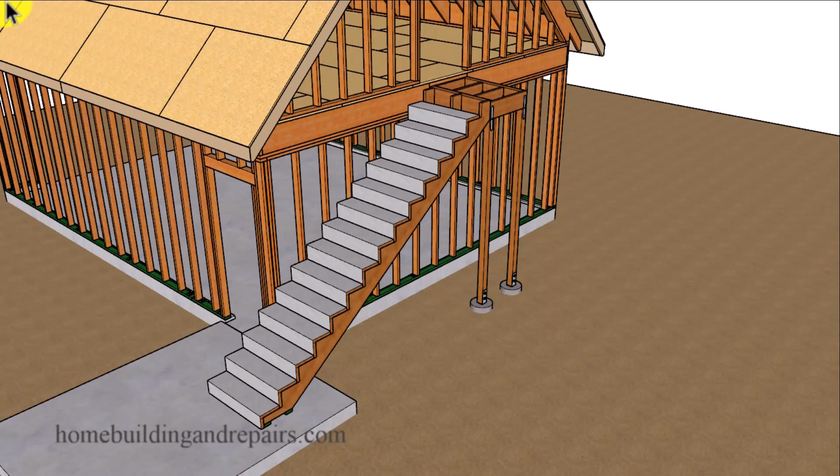In this video, I will show you how you can slope the stringers or connect them to a sloping deck, something that is going to be waterproofed or have some type of a waterproof surface on it. Now, before I get started, let's go ahead and take a look at what the stringers would look like if they were installed level with the deck sloping.

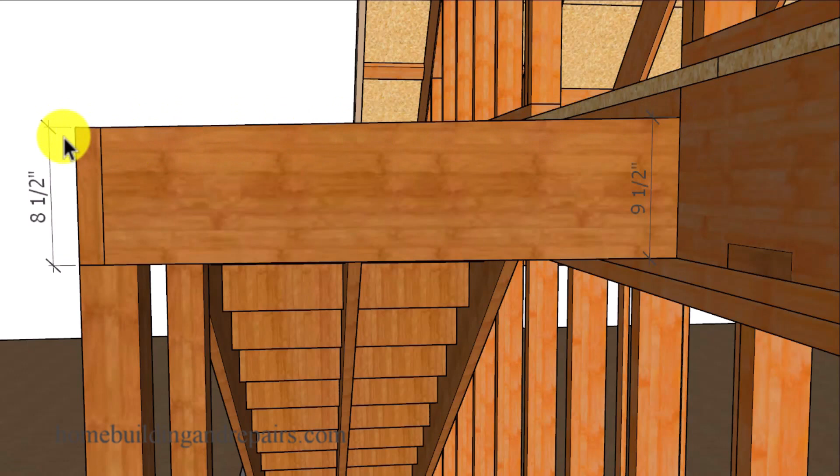So you can see here that the floor joists have been shaped on the top to provide a 1-inch slope in this area. And most of the time, a 1/4 of an inch per foot slope is required for a deck surface like this that is going to be waterproofed somehow on the top to protect the wood framing below.

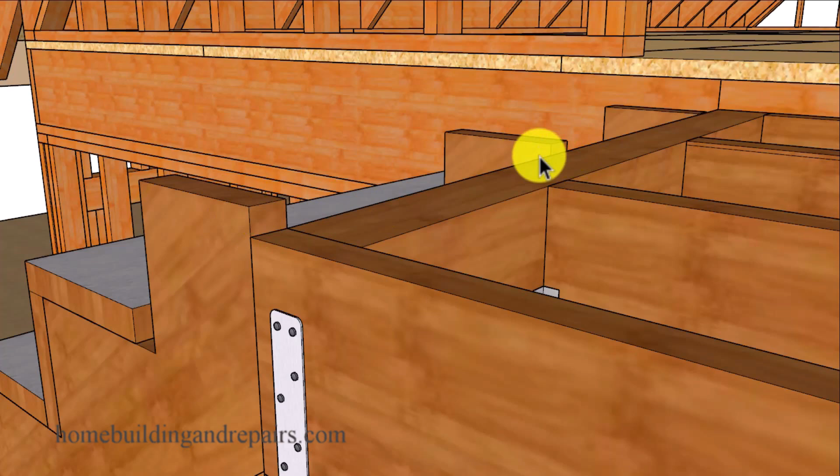So again, let's go ahead and focus on what we need to do to this particular stringer and this particular stringer. And I'm sure it's obvious to most of us, all we need to do is cut the top of the stringers to the desired height to match the slope on the deck.

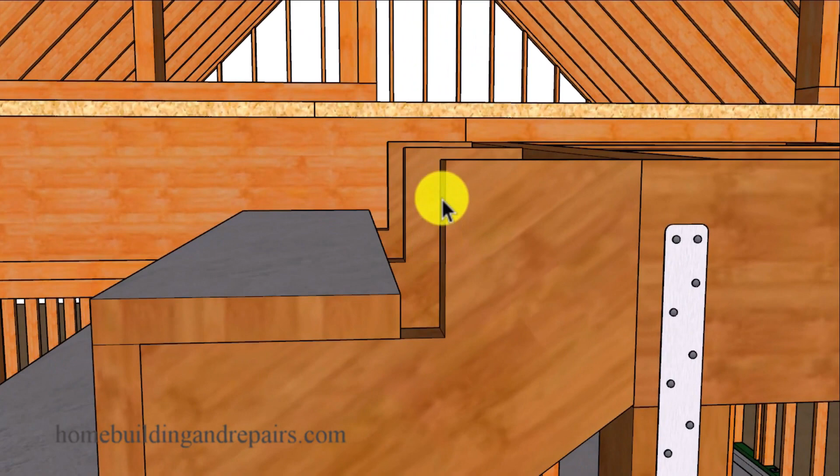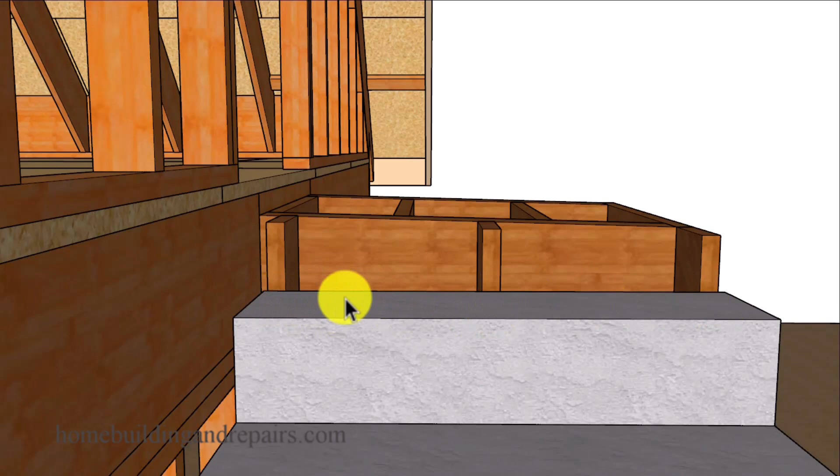And you could figure this out by using a little bit of math or creating a level surface for this step right here and temporarily connecting these stringers to the deck to where they would protrude up a little bit, and then you could simply mark the desired location that the cut will need to be made. And then, of course, you can install your waterproofing material.

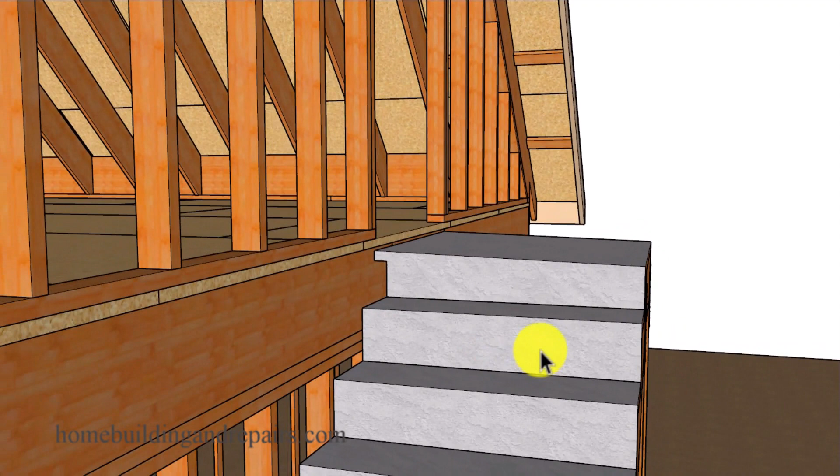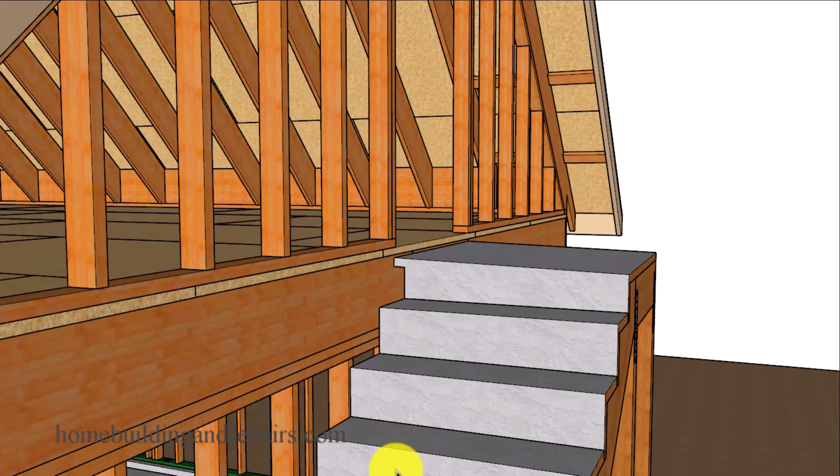Now, keep in mind that if this is sloping a little bit, your treads will need to be sloping also. Usually, we're going to have between 1/8 of an inch and 1/4 of an inch per foot slope going in this direction. The water will run down the stairs in this direction. And I know what you're thinking. Instead of doing that, you can slope the stairs in this direction and all the water can run off. However, that might not make your local building inspector happy.